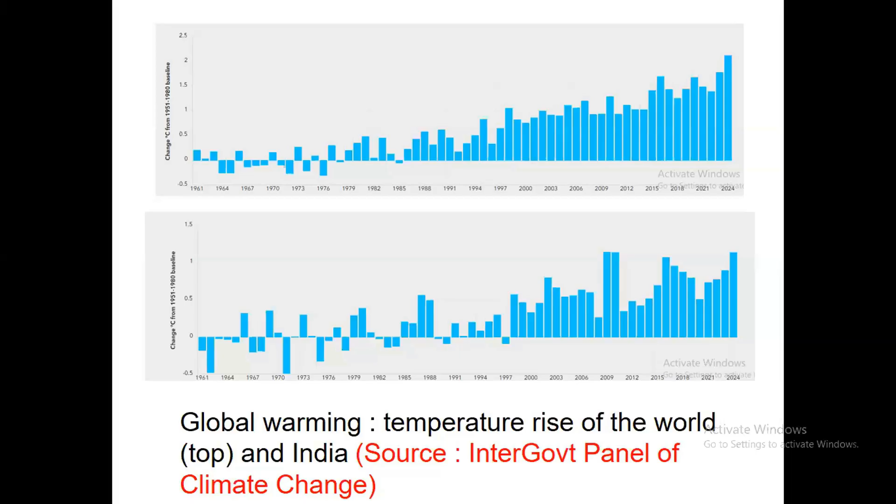Particularly people below the poverty line are suffering more. But nevertheless, we have to fight against that, and these issues become important, reflecting in different sectors, be it energy, agriculture, or water usage. We have to understand the context of the environment and how human health is related to that.

So now renewable energy has become very popular. It's well known that energy consumption is a measure of prosperity and well-being. Which country tops the list of well-being or prosperity depends on energy consumption, so per capita energy consumption is published to assess the economic situation.

However, the conventional sources, like coal-based power plants and fossil fuels like petroleum, which is also a major source for automobiles and many industries, come with issues of pollution, and the supply is not inexhaustible. It is a limited resource.

Now renewables are a viable alternative with abundance. Wind will be there, the sun rays will be there, the water and the sea waves will be there, so there is a lot of supply. Therefore they are renewable, and can act as a viable alternative, with the major advantage that pollution is less and the source is economically viable. So renewable is becoming more and more popular.

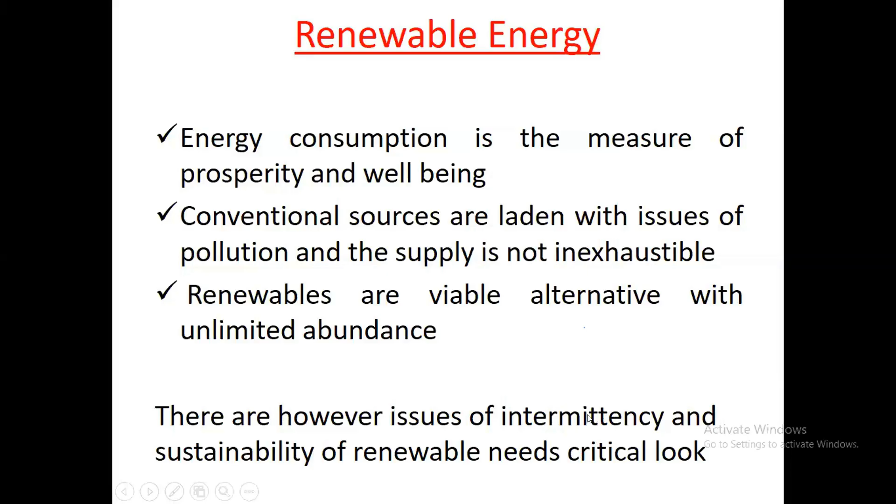So like solar, wind is also having the issue of intermittency. And even if you talk of water-based plants, hydel power plants, even water has scarcity sometimes. The supply is not always at the level we think a priori, that this much supply is always available. That may not be true.

So I already told you that I'll first talk of some wind energy technology, and then talk about sustainability. That sustainability is not so easy to assess, even for renewable technology.

So first, wind turbine. Basically a wind turbine is an energy converter which receives a portion of solar energy, because all of us know that because of the sun's rays and the heat they carry, that actually produces the field which moves the wind. So in a way, wind energy is again the contribution of the sun god.

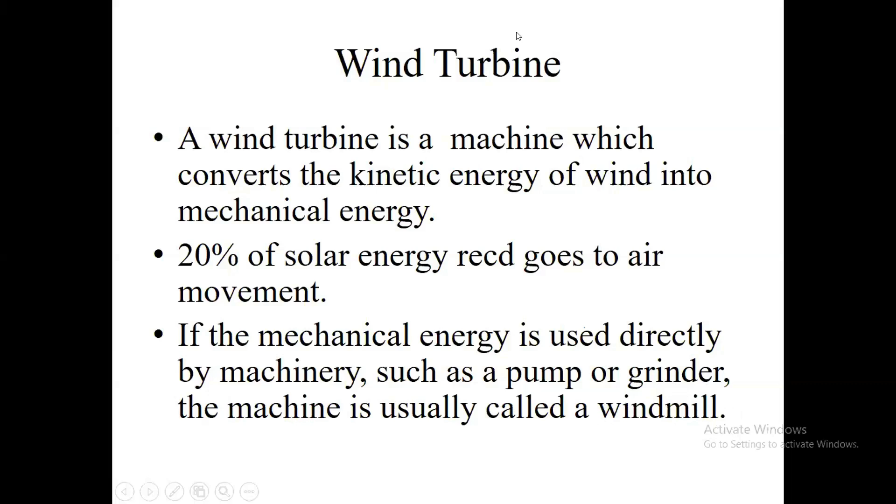So one wind-related terminology is windmill. In ancient civilizations of Europe, you'll find a lot of windmills. A windmill is not a wind turbine in the sense that it does not deliver electricity. A windmill produces other work, like grinding wheat or barley, or pumping water. So if you convert energy to electricity, then it is a wind turbine. Otherwise, we call it a windmill.

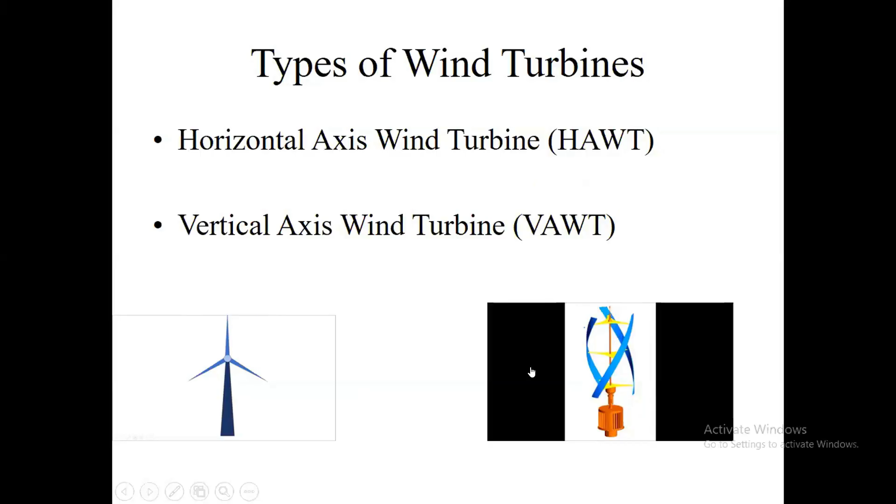So there are two types of wind turbines. One is the horizontal axis wind turbine, which is like a table fan - the axis of the turbine is horizontal. There are relatively fewer vertical axis wind turbines, where the axis is vertical, like an inverted ceiling fan.

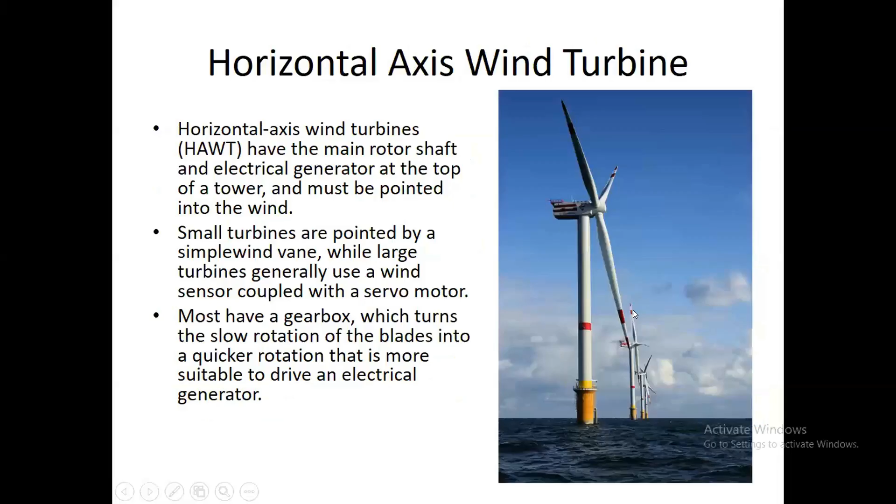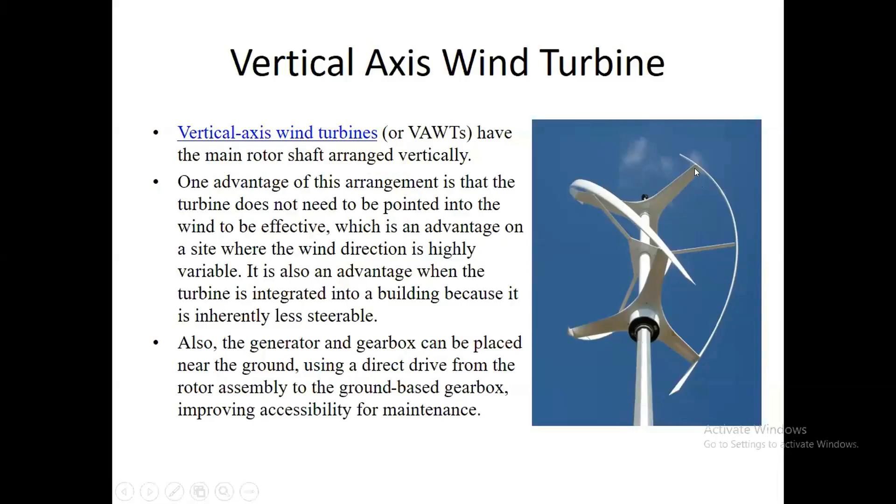But mostly horizontal axis wind turbines supply more power compared to vertical axis wind turbines - they are more efficient. Vertical axis wind turbines work better when the velocity of air is low. So where I have a lot of air supply, I should go for a horizontal axis wind turbine, since they are more efficient. But if I want to tap energy from the roof of a high-rise building, where there is some flow going, then I can use a vertical axis wind turbine instead.

So there are different designs you can see. My lecture is not meant to be purely pedagogical - rather, I want to make it interesting in an overall sense.

Without going into technical details of the parameters, I'll just mention the main features. There are basically drag type and lift type wind turbines. Drag type is like buckets, similar to a Pelton wheel where water hits the wheel and it rotates. Similarly in drag type turbines, air hits and rotates it. But in lift type, the profile produces a lift action and then it rotates, like an aerofoil blade.

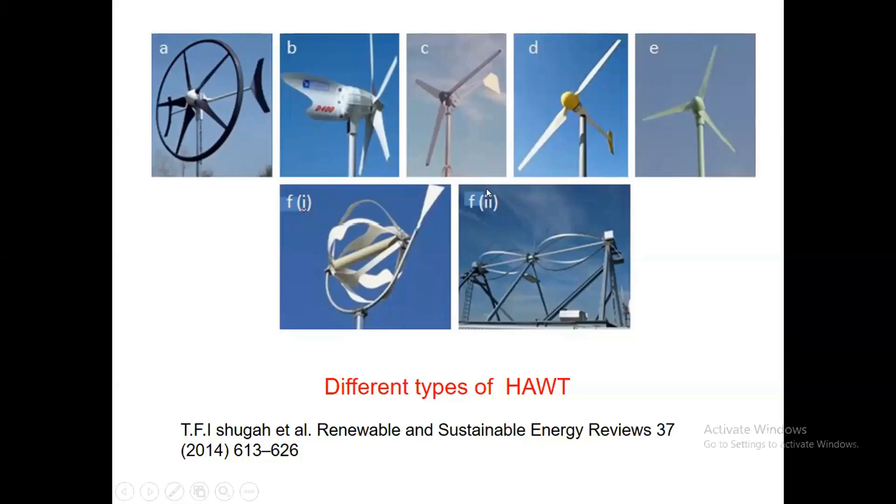Darrieus turbines are basically lift type wind turbines. They operate with an aerofoil type shape, so a high level of lift is generated, which helps it rotate.

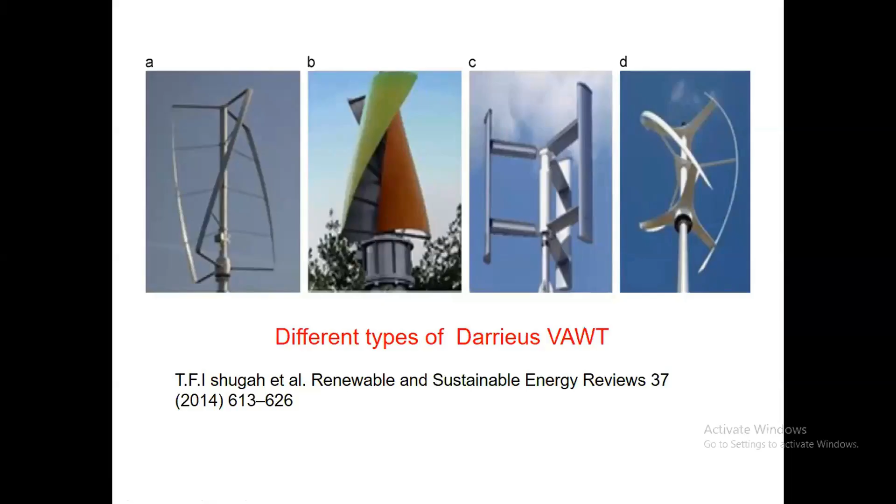Because energy is an important commodity everywhere, people are trying to capture whatever energy is available. If you look at Boston airport, on the roofs there are a number of turbines for capturing whatever energy is there.

For example, you may be aware that in Kolkata airport, a lot of solar panels have been installed in the runway area, because apart from the paved roads there is a lot of space where planes don't go, just like a field full of grass. So one part of the runway is covered with solar panels, and therefore it is possible to supply a large part of the energy required for the building from the panels.

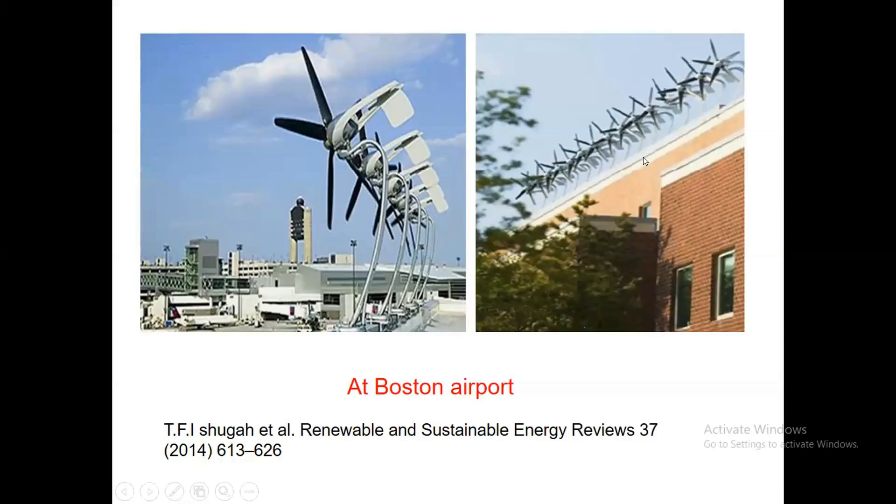Similarly, this is often a strategy to harvest energy from the flowing wind from the top of a building using certain turbines. You see one clever design: windmill on highway.

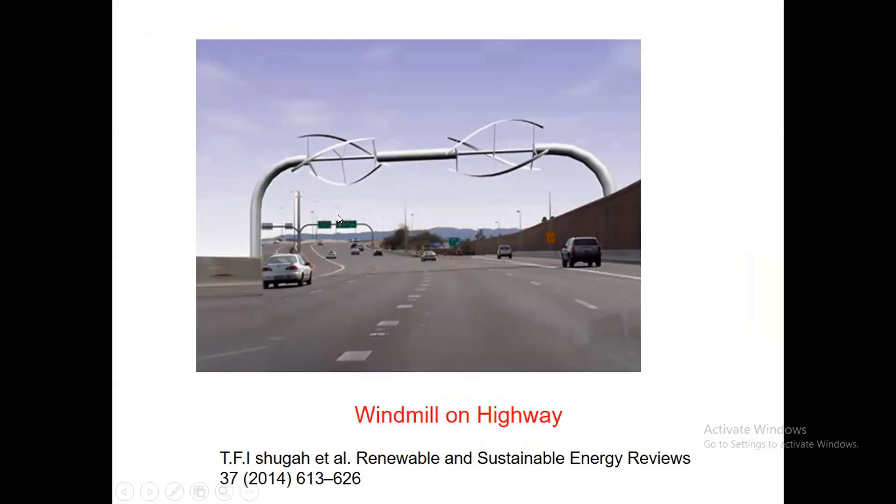So these are two wind powers, I mean wind turbines. There is normal air plus the vehicular movement that also creates some flow field. This can provide energy to these turbines, which can generate a certain limited amount of energy, and they can feed, for example, directly to the traffic lights. Traffic lights need energy, and it can be fed from here.

Sometimes you combine designs, so wind energy blade design is actually a research area. You can do many things here to maximize your energy availability, and therefore combinations - like using different types of airfoil shapes for the wind turbine blade, combining the Darrieus type, which are lift type wind turbines, with Savonius, which are drag type or bucket type wind turbines - you can combine them.

These are like simple drag type, with no blade angle or anything, just strips. But here there are some aerofoil shapes designed. Together they can harness more amount of energy. So this is again an interesting area where you can just try to increase the efficiency.

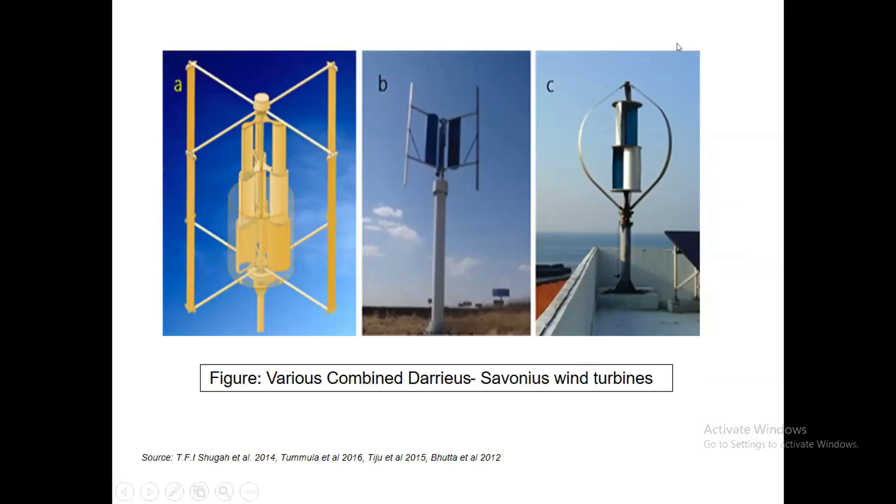This is one of the classifications when you talk of windmills or wind powers - like hydel energy too - the smaller ones relatively 10 kilowatt, intermediate 10 to 250, and even wind turbines are producing up to say 25-30 megawatts of energy. A single turbine can even produce up to 30 megawatts of electricity.

That is by manipulating the size of the blade, you can have as much energy as 30 megawatts. The fact is you need a longer blade, and the height has to be more too, because as you go along the height, as you go up, the wind speed increases. You all know the boundary layer concept - near the earth, the velocity of wind is less, and it increases with a power as the height increases. So that is the strategy.

But then, when you have multiple wind turbines - most of the time there will not be a single one, there will be a number of multiple wind turbines, which will be called wind farms. They are connected to the grid, supplying power to a locality or to a country. A small one is for remote applications, like for example a remote island, where a house may have its own dedicated windmill.

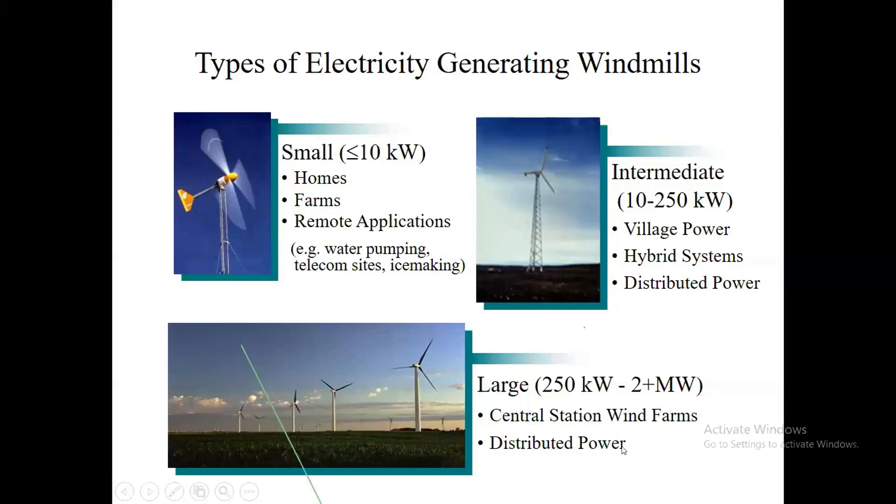But such large plants must be connected to distributed power, so that it is in the grid and can be controlled.

I have some old data. New data is also available, but I have not found time to update it much. Still, it will give you some idea.

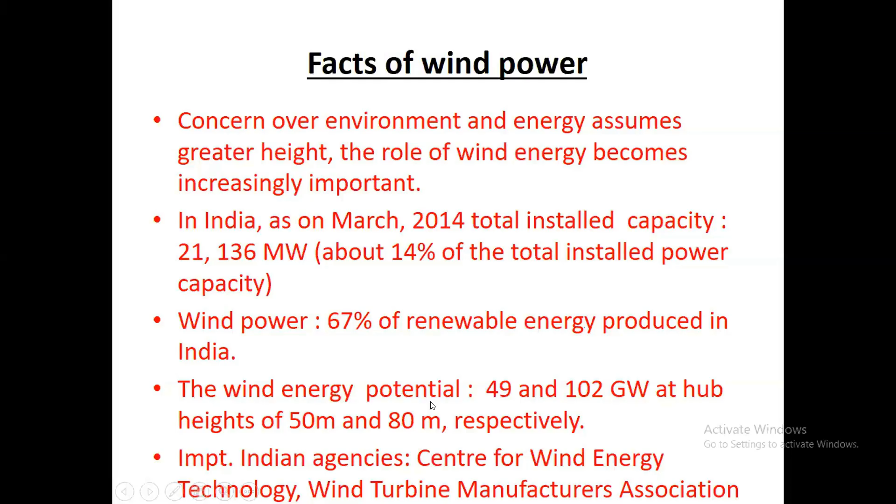Wind energy potential is 49 gigawatt at 50-meter height and 102 gigawatt at 80-meter height, and total installed capacity was 22 gigawatt, so now it will be something like 35. We have the potential of 100 gigawatt, so we can still extract a lot of wind energy, and it is related to the height. If I increase the height of the turbine tower, I can extract much more energy.

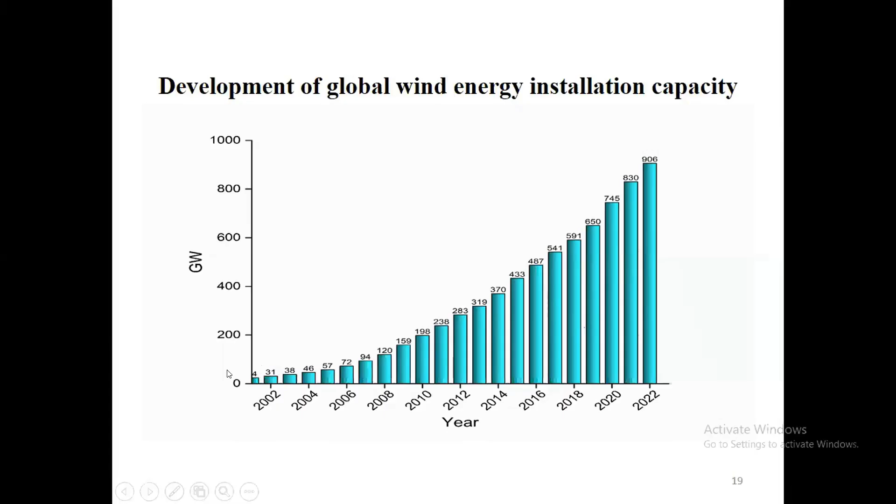Like wind energy, if you look into current data worldwide, you see that almost 1,000 gigawatt of energy was produced in 2022, so by today it will be another 500 gigawatt. It is actually growing exponentially, as the plot depicts. In 2002, how much was there? Only 31. So in 20 years it has grown 30 times.

When renewable energy grows this fast, naturally the cost of energy comes down fast. That is very important, because people will not go for something costlier than the available technology. Whatever the merit, the cost must come down, and that is also an aspect of sustainability, that cost is given its due importance.

Now we can safely say that the cost of electricity per unit for renewable energy and coal-based power plants is at par. That is why countries abroad have almost phased out coal-based thermal power plants, and India can also make strategies to go for...

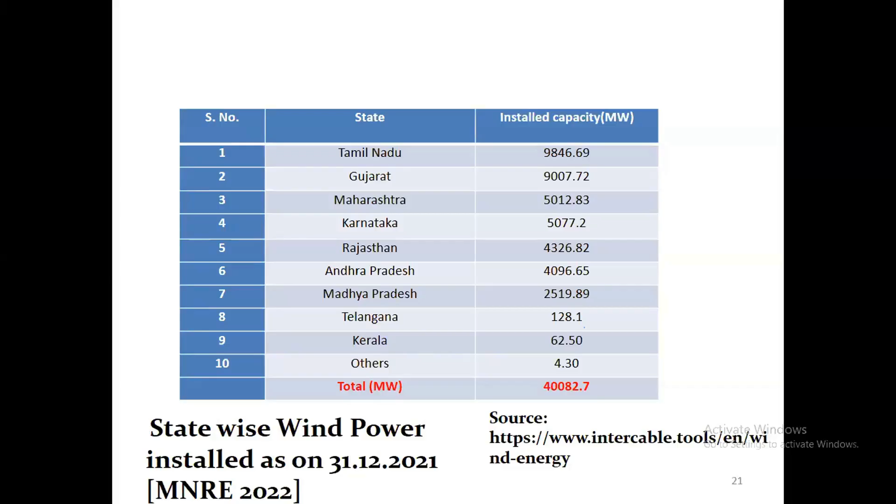Replacement of coal. Of course, in the near future, coal cannot be replaced, because we have a huge population with a lot of power requirement, and the supply of coal is also there, so it will continue. But we can afford wind energy as the sizes of the plants are increasing. Eventually cost has to come down, which has happened, and which is giving us the advantage.

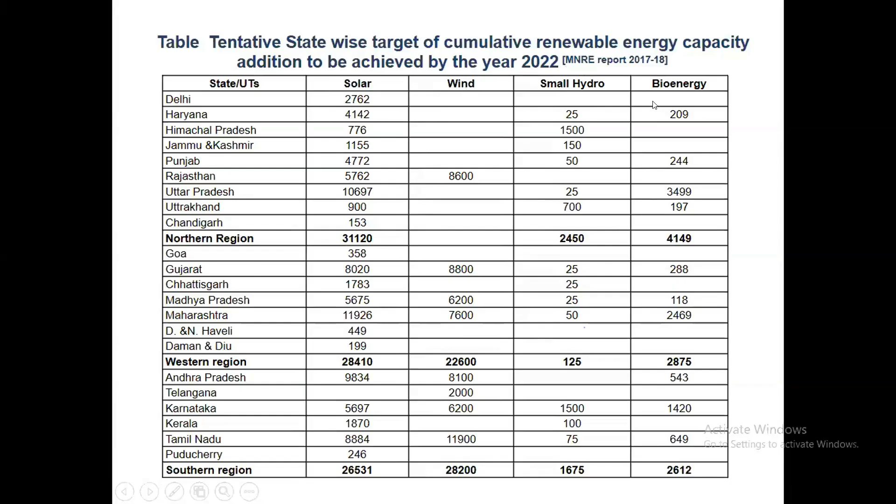State-wise, let me skip this. There are tables you can find in Ministry of Renewable Energy, non-conventional and renewable energy reports. They publish reports regularly, and you can see how the states are growing in different sectors like solar, wind, hydro, and bioenergy.

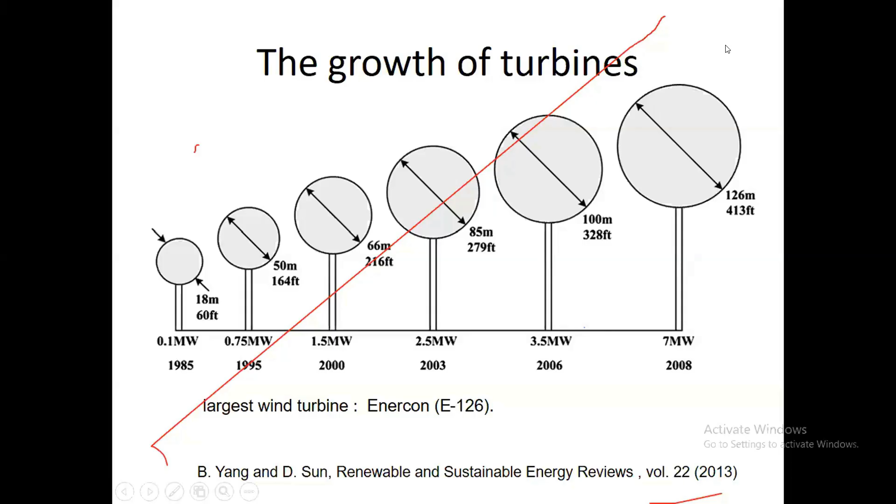The very interesting thing is the size of wind turbines. A typical wind turbine is a very big machine. The diameter of the rotor is something like 413 feet, almost like a football field. One huge structure we are habituated to see day to day is an aeroplane, and aeroplanes are huge, but still larger are the wind turbines. They are growing very fast, becoming very big entities, posing more engineering challenge, technical challenge, and sustainability challenge as well.

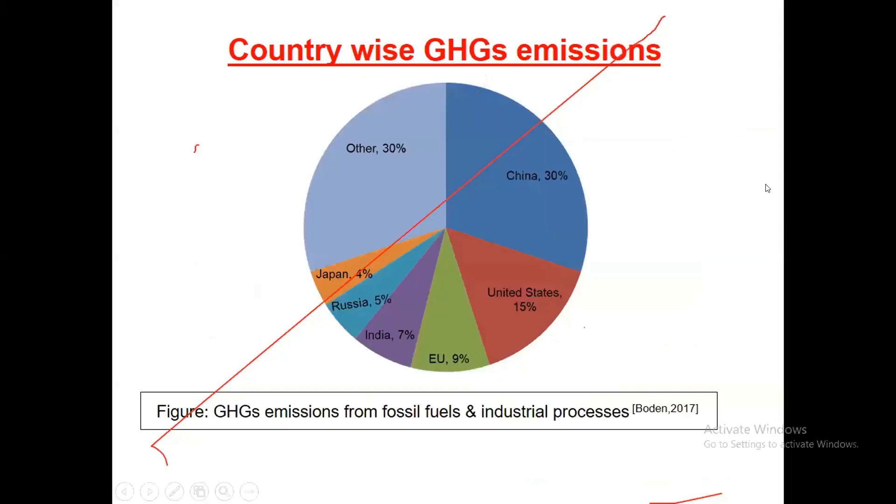So we are talking of wind energy, but this is greenhouse emission—I'll skip that. So in the context of renewable energy, this is important to mention.

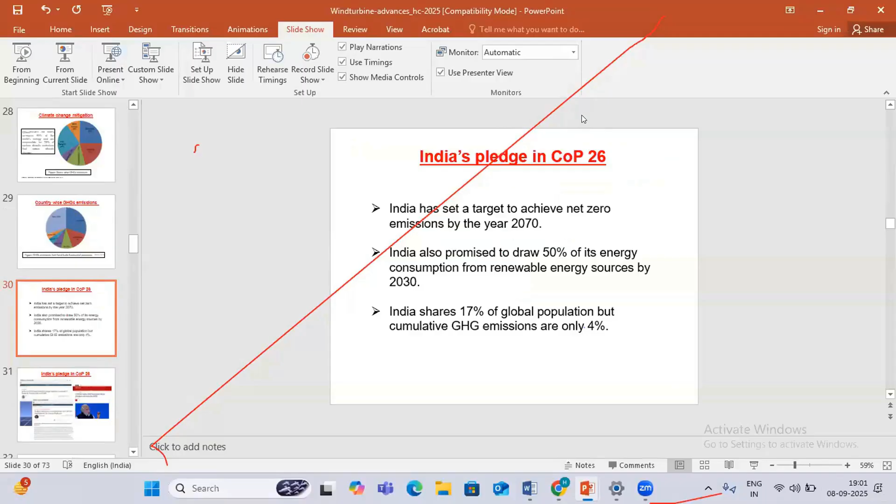This is important to mention about India's pledge at the Conference of Parties, which is a climate-related event, represented by the Prime Minister of India and other departmental representatives from different ministries. We have promised to have net zero emission by 2070, and by 2030 our promise is to develop 50% energy from renewable sources.

One positive fact for India is that we have almost one-fifth of the global population—every 5, 1 is Indian—but our emission is only 4%. That means per head emission for Indians is very low. That does not mean we should not work on renewable energy, but it means we have some leeway, some more area to work on, and we can still continue for some time with carbon-based, hydrocarbon-based, coal-based power plants.

So this Conference of Parties, they are given a lot of weightage. Like India says solar energy is 17 times in 7 years, so similar figures I have shown for wind. Wind is also going very fast, and net zero is placed by 2070.

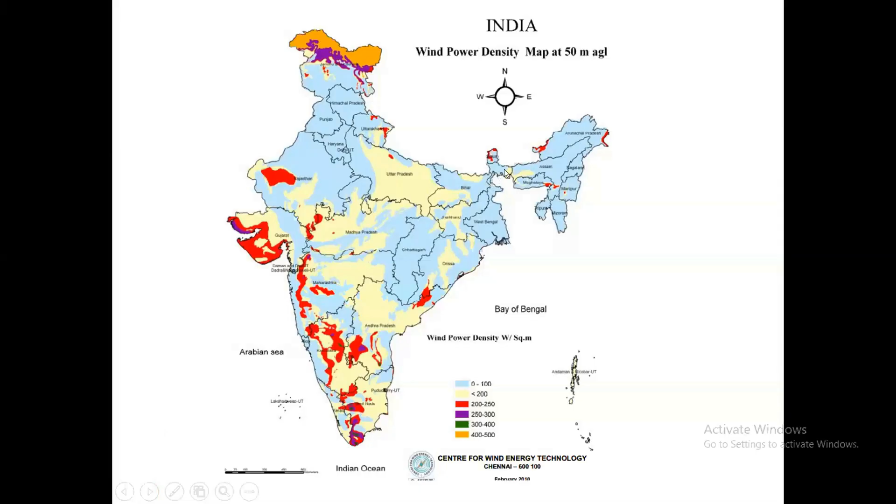Now talking of wind, can we put wind energy everywhere? We need something like power density, watt per meter square. This map shows which areas are energy dense, so it is easier to put wind turbines there. Where the flow is not much, only small wind turbines can be used, some vertical axis wind turbine technology on the rooftops of buildings. But the coastal areas, for example, or the Himalayan areas, you can use where we have higher power density.

So wind, we have to remember, is stochastic. There are a lot of works on wind speed. Wind velocity changes every minute, every hour, every day, every month, every year. You will see that even the average wind speed of this year may be 30% less than the last year. So it is highly stochastic.

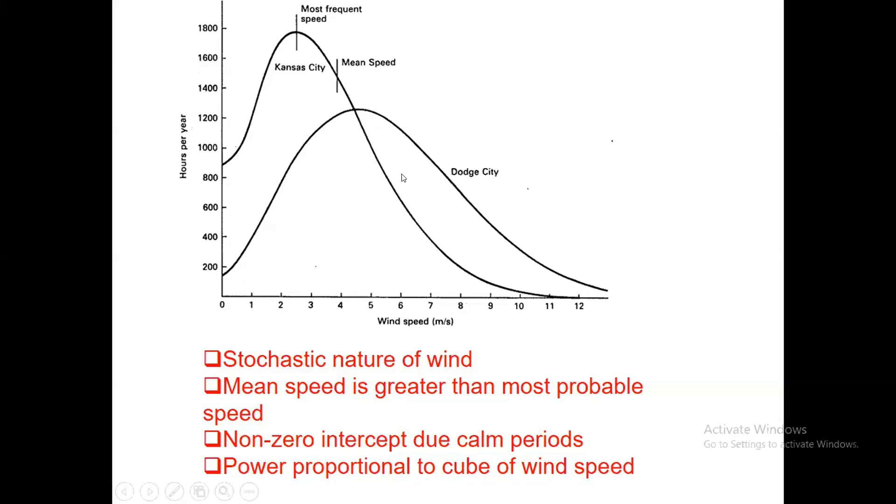So if you want to analyze the data and use it for engineering design, you have to do a lot of calculations based on statistics. For example, many of you know why statistics is used for wind energy. We'll not go into the details, but we have to remember this wind speed distribution in hours per year - that means almost 1,000 hours it was average 6 meter per second. But it can vary, as I said, day wise, month wise, year wise. So it's very stochastic in nature.

The important physics of the wind turbine - again we will not go into detail, but most textbooks give the basic thermodynamics of a wind turbine. As you know, thermodynamics governs the energy. Here, of course, we are not talking of heat, but energy - what is the limiting energy, what is the maximum energy we can extract?

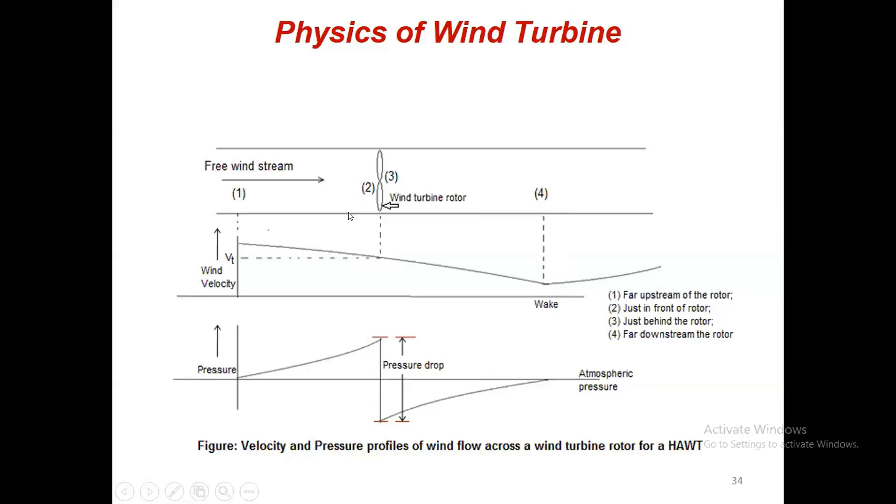So this is a rotor, wind is coming, and this wind turbine rotor will extract the energy. Naturally the velocity will fall here - wind velocity across the rotor will fall, and further down there will be less wind energy. So this kinetic energy is extracted, and for preliminary purposes you can do a simple energy analysis using the first law of thermodynamics and continuity.

So finally you can arrive at a relation that the maximum power of a wind turbine is 8 by 27 times density of air, area of the turbine, and the cube of the velocity of air. Remember that wind power varies with the cubic power of air velocity - that means if your velocity is doubled, wind power will be 8 times. Naturally the area will be there, the density will be there.

Density is more or less constant everywhere. Area is how big the turbine is, and velocity is cubic. So this is the input energy, rho A v1 cube - that is the kinetic energy, half rho A v1 cube. You know wind energy is kinetic in nature, so kinetic energy is half mv square kind of thing. If you divide this by that, you get a factor of 16 by 27.

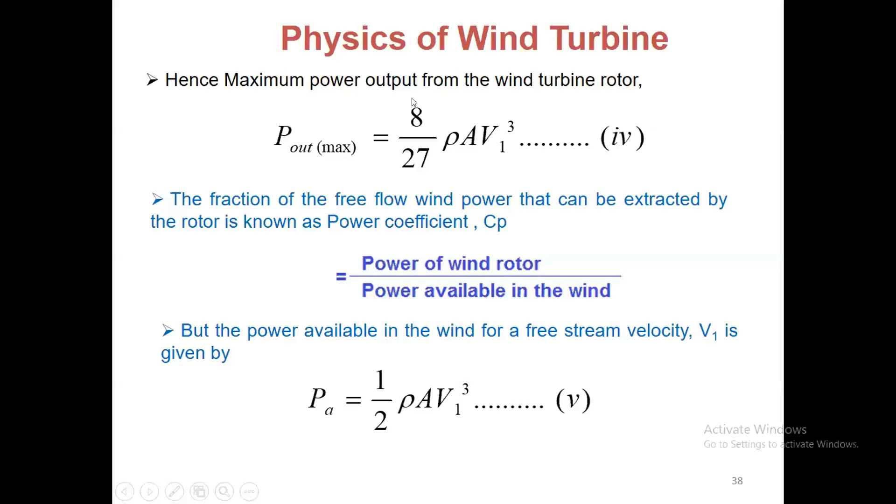You may remember the Carnot cycle - Carnot cycle in a power plant gives the maximum efficiency as 1 minus T2 by T1. No way can you get more efficiency beyond the Carnot efficiency. Similarly here, if you apply the basic fluid mechanics and thermodynamics of energy conservation, you get a ratio of 16 by 27 - this is called the Betz limit, 0.593. This ratio of the power of the wind and the power you get from the turbine is called the power coefficient CP.

So this CP can be maximum 0.593, or 59.3%. Again, it is a counterpart of the Carnot efficiency in a thermal power plant. Similarly, in a wind turbine this is the limiting efficiency coming from basic fluid mechanics with law of energy conservation. However, we'll get much less than that, and particularly a horizontal axis wind turbine will have more efficiency than a vertical axis wind turbine.

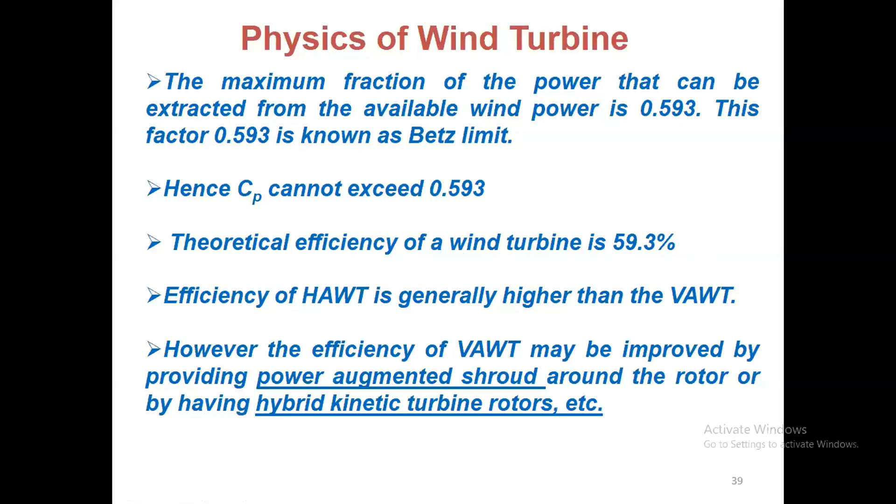It can theoretically give cubical power and go faster, but we don't operate like that, because finally you have to produce electricity with certain restrictions - a fixed frequency, a fixed voltage. It has to be synchronized with the grid and the machines it supplies. So within a speed range, we operate at rated power.

At a certain speed it starts producing power - that is called the cut-in speed. Then we reach rated power, and after that, when the speed is very high, it will cause stress on the blades, so we don't want to operate there. We stop the turbine using a brake mechanism, so it stops at that point.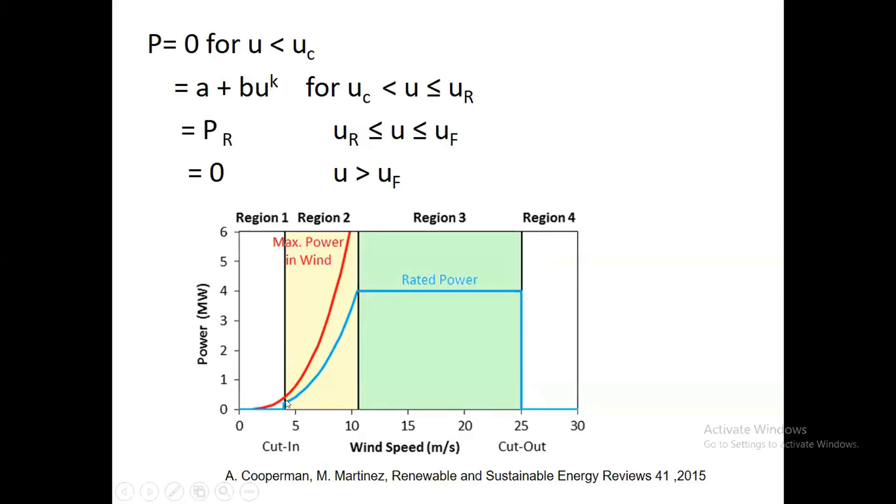This is called the cutout speed. Theoretically, power can go like a cube, following this curve, but practically only in this middle range is it variable, and then we supply at rated power. So cut-in speed is where power generation starts, rated speed is where rated power generation occurs, and then there is a furling speed or cutout speed - when you apply the brake on the wind turbine, it no longer gives you power.

So there is a power curve, and when you buy a wind turbine, the manufacturer will give you this power curve.

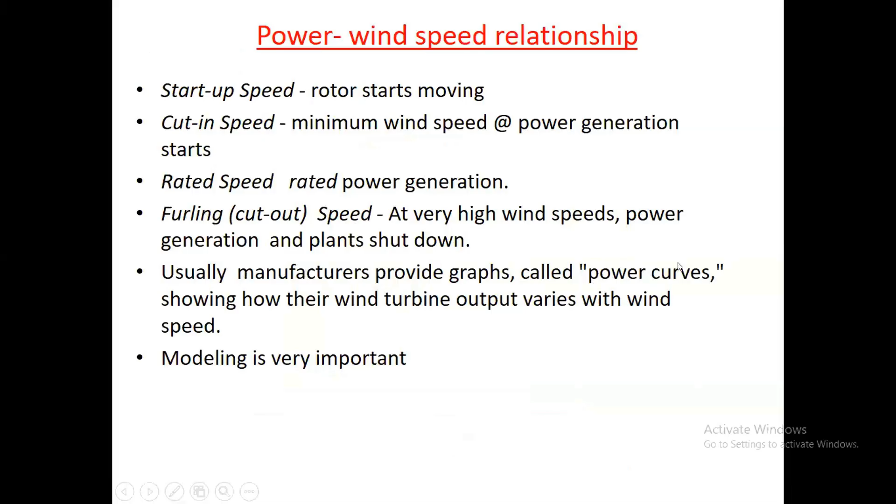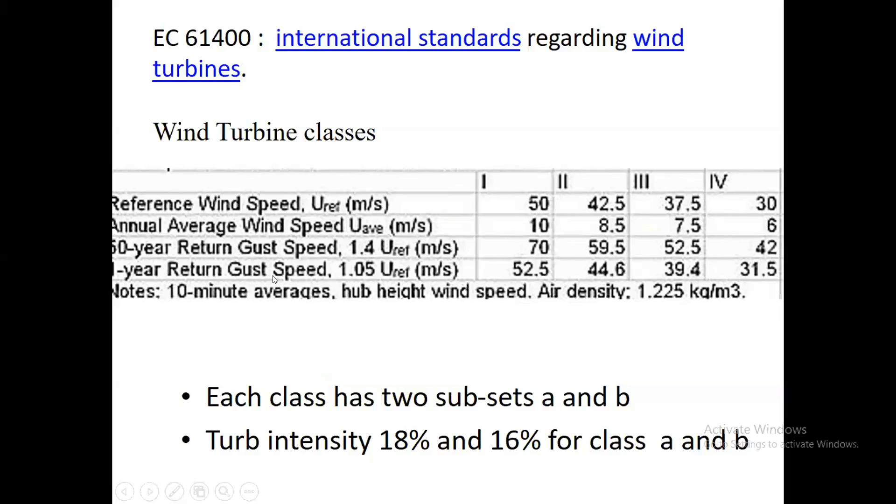Now there are certain standards, like wind turbine classes - you have to follow standards like type 1 to type 4. There is a certain reference wind speed for which turbines are designed, and these have now been standardized.

You can also have a scale of velocity, so a lot of data has to be analyzed. Wind speed measurement is typically made about 10 meters above the ground. Small wind turbine heights are 20 to 30 meters, while large turbine heights will be around 100 meters.

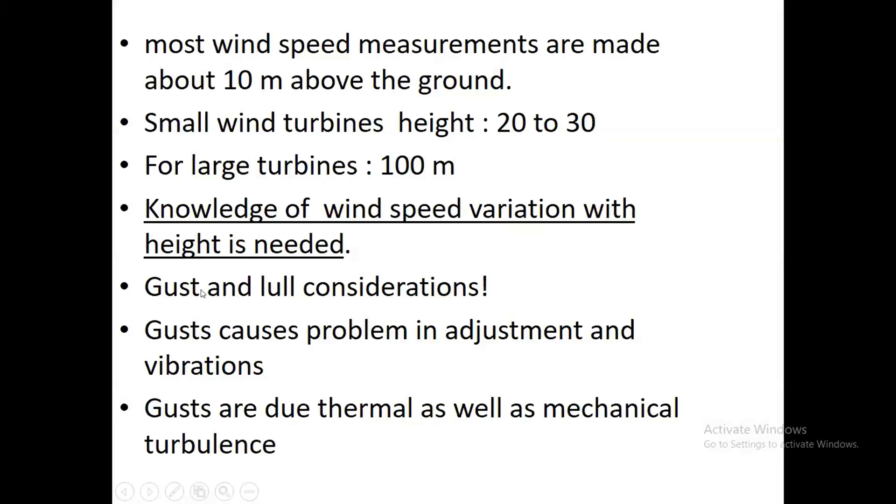Then gusts and lulls - very high speed variations and such things - have to be considered because these are dangerous for the wind turbine blades. So all these meteorological factors are important.

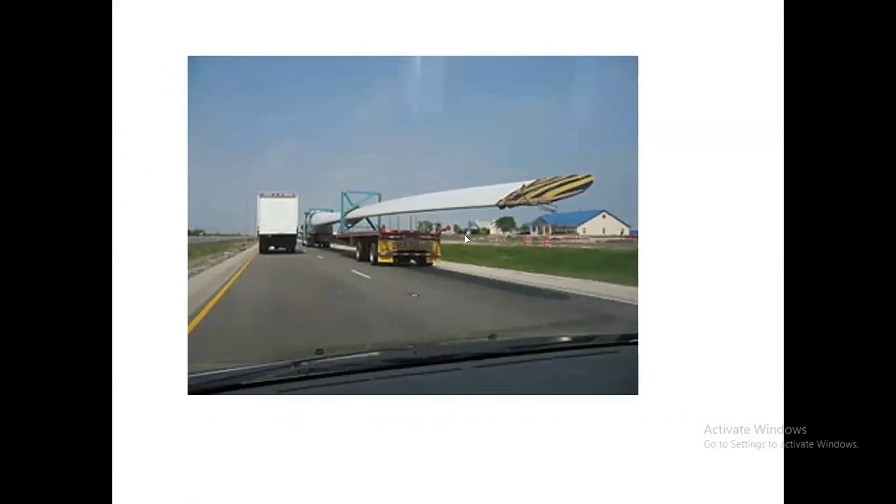This picture shows one blade being transported on a truck, to convey that this is a very, very huge structure. As I said, it is bigger than a plane - one of the biggest achievements of technology.

You can measure wind speed using anemometers and balloon releases. Wind also affects the physical locality, and from that people have gathered evidence and knowledge about wind velocity - like sand dunes in certain areas, and even lake structures. If you look at the topology, you can get a visual indication of wind speed from these important facts.

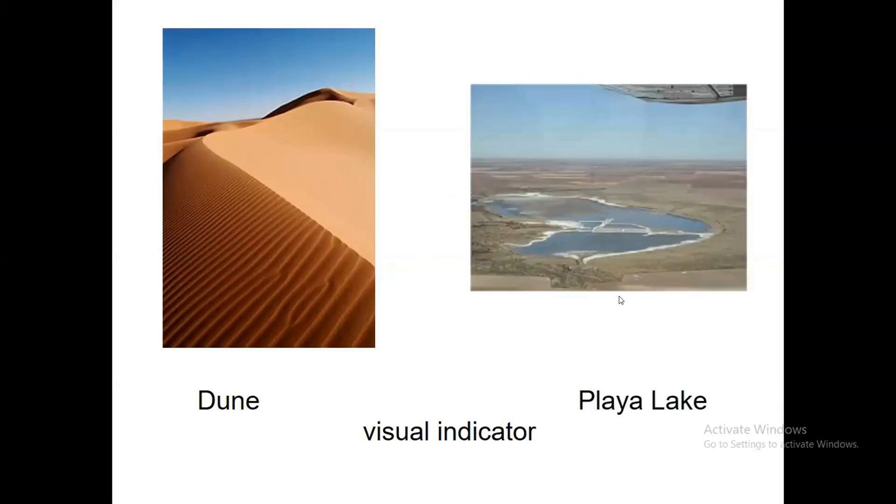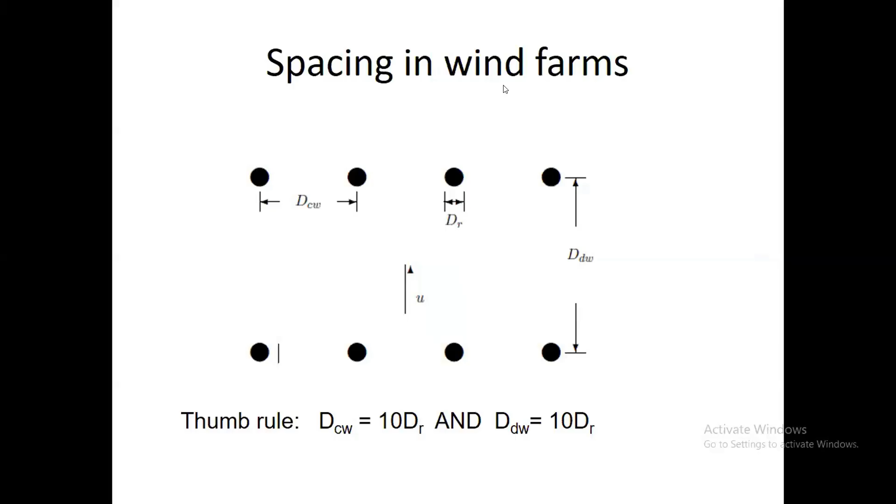I mentioned wind farms - there won't be just one wind turbine, there will be plenty of them. So the gap between them, the pitch in the horizontal X and Y directions, is important, because if there isn't enough distance between two wind turbines, the energy extracted will be less. The air carries energy - if one turbine extracts energy, the velocity behind it will be low, so the velocity must still be proper enough for the next wind turbine. These considerations are required in wind farm design.

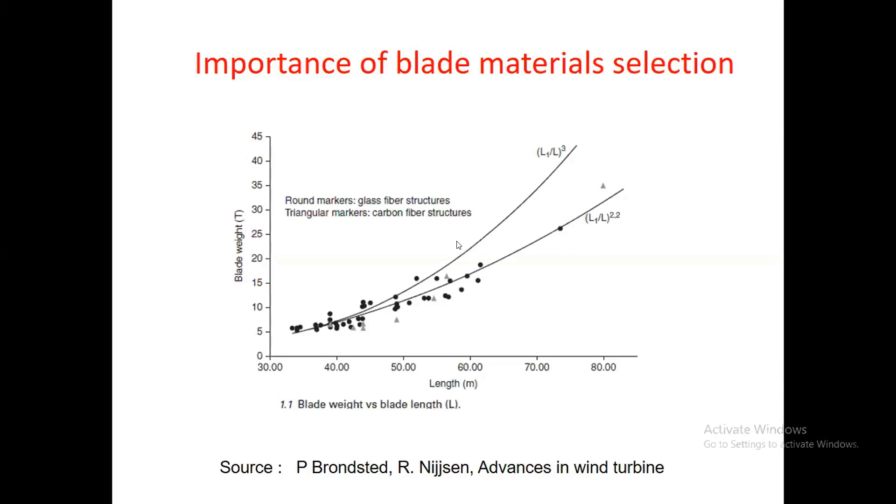So the design of wind turbine blade is a compromise between aerodynamical and structural considerations, because aerodynamically it must rotate fast, but it is also a structure, so it has to withstand the stress. So the outer part must be aerodynamically correct.

For example, a plane will not fly if the profile is not proper to generate that lift. Similarly, for a wind turbine to work, it must follow the aerodynamic considerations for the outer part, but the inner part must provide the strength. So structural consideration is for the inner part of the blade.

So therefore it is typically hollow with outer geometry formed by two shells, one on the suction side and one on the pressure side. So structural webs are fitted to join the two shells to transfer shear loads.

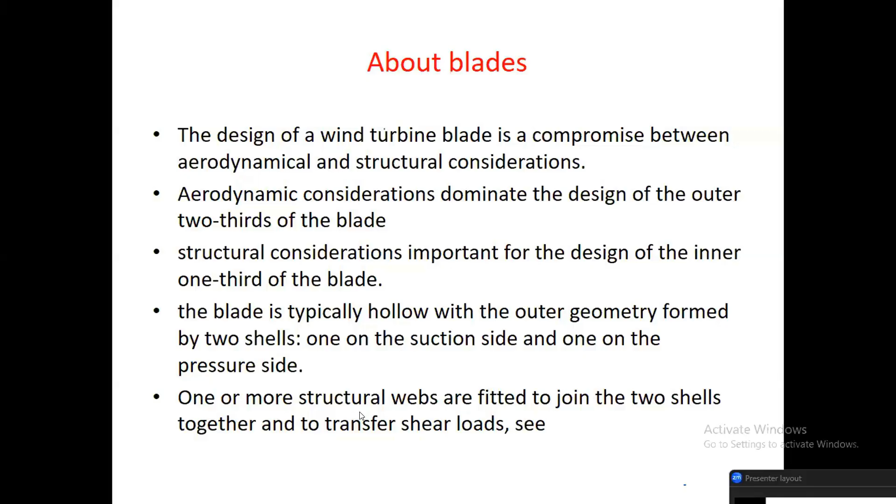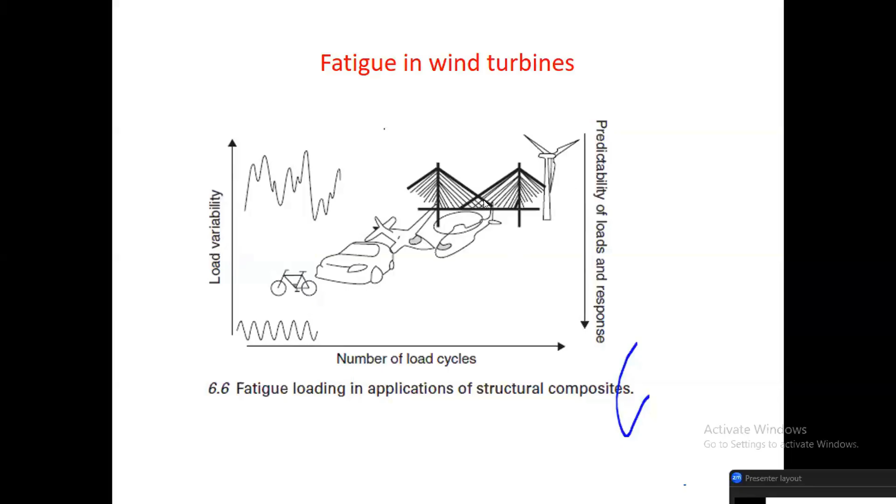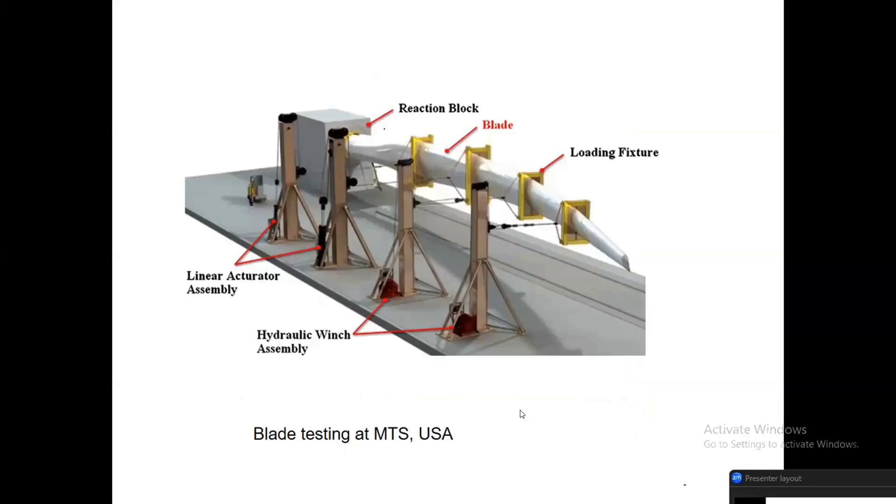So there are wind turbine test benches, which require huge space and structure, like blade testing at MTS USA. And this surface, the blade surface, apart from the fluid mechanics part, again you have to be careful with the surface. It may need coatings.

So a wind turbine can be in a very cold zone, minus 50, to a hot desert. It is subjected to UV radiation, chemical attack, blood from insects, or feces from birds—these are the things that affect the surface. There will be lightning. So naturally, if it is a huge structure, occasionally there can be lightning.

Then ice can form over this. The rain will be splashing over it. So all these things make the protection and coatings a very serious issue. For which again a code is there, IEC 61400.

So my purpose is to draw attention that this is basically a fluid machine delivering energy, but so many issues are coming there, from design to material.

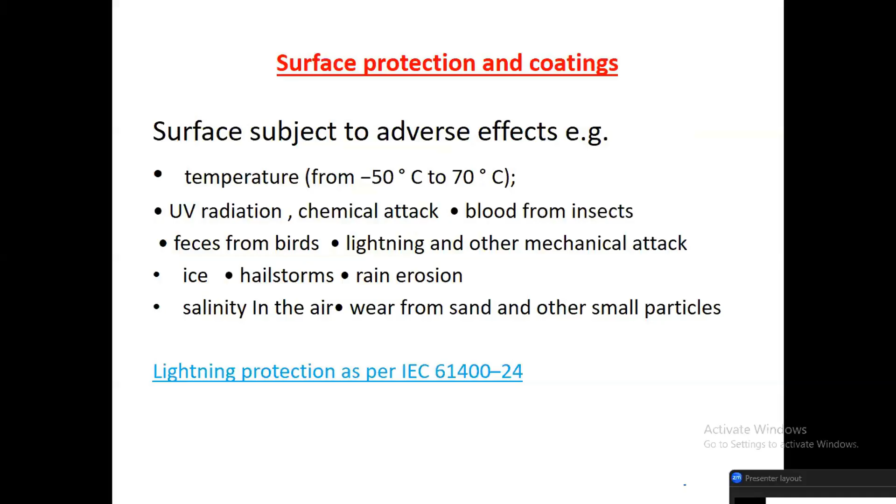So the CFD part itself is a subject of a big topic. A lot of CFD work is being done, because if you want to understand the basic physics, you have to solve the structure, solve the thing in terms of numerical analysis.

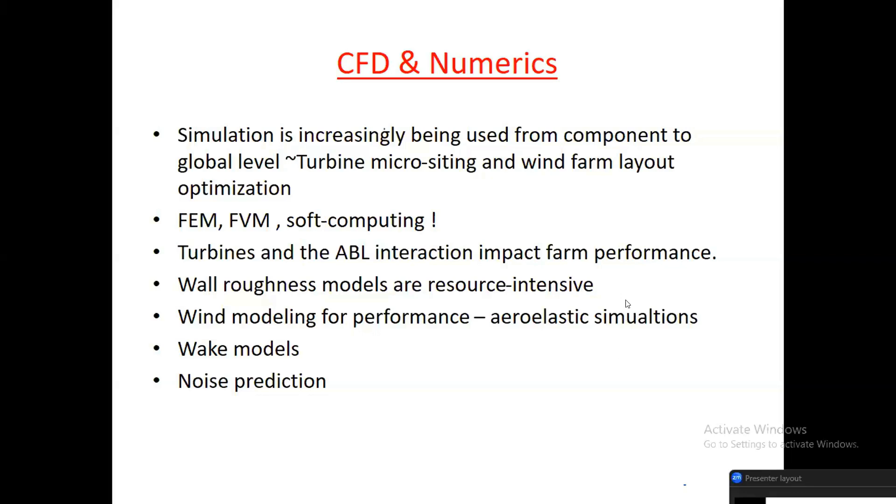So from that, you can even predict what kind of noise will be there, because noise is basically the pressure field. So if you can resolve the turbulence properly, you can predict the level of noise it can give. You can do the performance analysis in terms of aeroelasticity, so not only power, it will deliver the associated stress level.

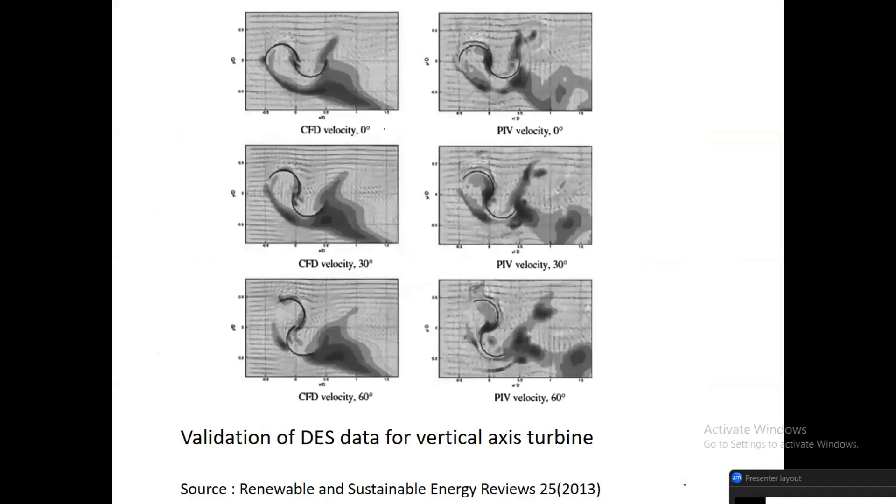These I can skip, but these are, for example, you can have insight from the simulations on the flow structure.

So the ultimate aim is to understand the power it can deliver and the stress it can have, and also how it behaves during starting and during closure, and also the steady state operation.

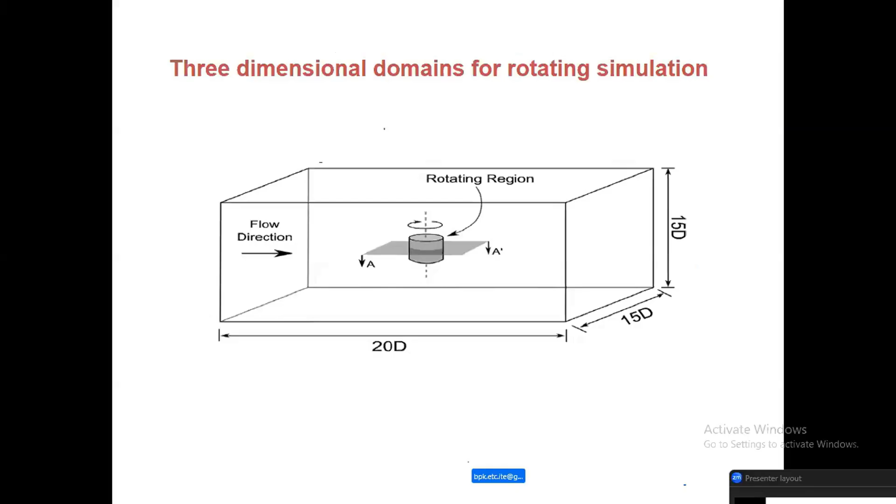So to do that, you can take help of numerics. I'll skip about the numerics part, but now the pollution issues are again predominant here.

So I'll go to the sustainability lecture. I have some 20 minutes or more than that, so enough time is there. I'll go to the sustainability lecture shortly.

But in this basic lecture itself, let us see that wind energy, we call it green energy, but yet it is a source of noise pollution, because the machines are running very fast, so there is continuous generation of noise.

Then there is visual effect on surrounding. It is a fact that in many places people object if you put up a wind turbine. For example, in certain places in India, if a new plant is announced, the local community may challenge it based on the claim that it disturbs their ecology, peace, or heritage. Similarly, airports in advanced countries are built away from cities because people are disturbed by the noise of planes. If a company wants to build wind farms in a hilly area, people may say their scenic beauty is disturbed. For this there is a term: not in my backyard, called NIMBY.

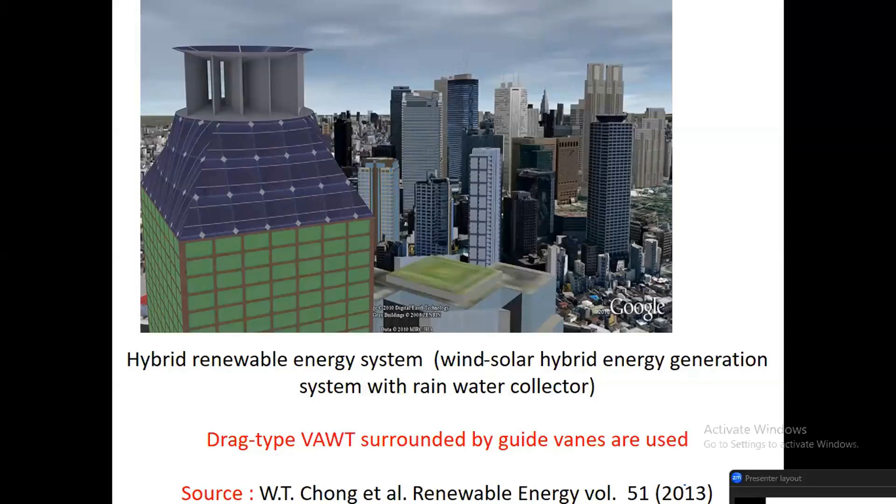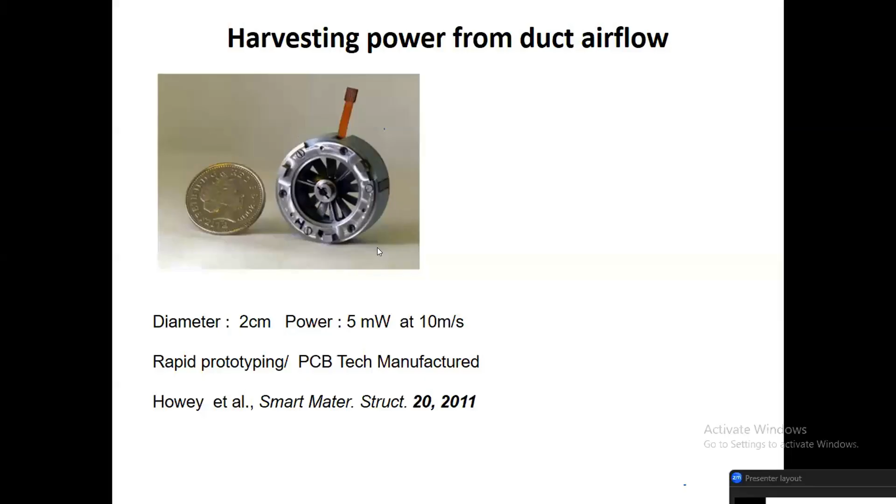For example, at 10 meters per second, this 2 centimeter mini plant is delivering 5 milliwatts. These are in infancy as a research area, but who knows, one day they can be utilized more cleverly - this energy could be good enough to charge a mobile phone. So just with a pocket wind turbine, capturing a small stream of air, that can fit to a charger and your mobile will get charged.

To summarize the scopes of research in wind energy: first, we require as much energy as possible in all sectors, be it a car engine, thermal power plant, or hydraulic power plant. Even a small increase in efficiency, less than 1% or 0.5%, is meaningful in terms of economics and environment. So performance and capacity improvement will always be a research area.

Therefore aerodynamics, blade design, new types of turbines, control strategies, and of course the corresponding electrical part need improved generators and better magnets, because you have to extract as much power as possible. Cost reduction is always there too, possible through blade design strategy and selection of material, and if you increase the height of the wind turbine, you get more air velocity.

Now you require statistical tools to predict, forecast, and assess the life of the wind turbine, particularly for wind speed, which is stochastic in nature. You need to analyze the wind power potential or wind power density in a better way, and then apply it in zero energy buildings and energy harvesting. Small turbines can also be used for micro electromechanical system applications.

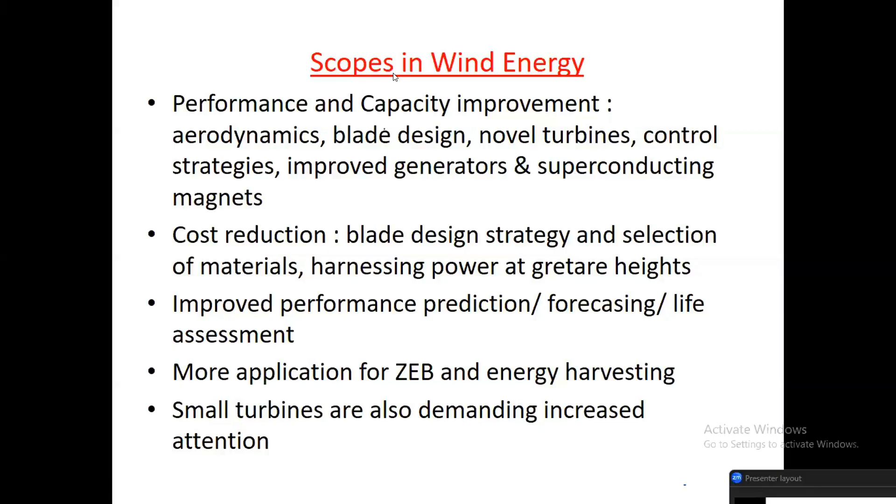Now I will go to the second lecture. I have divided it into two presentations.

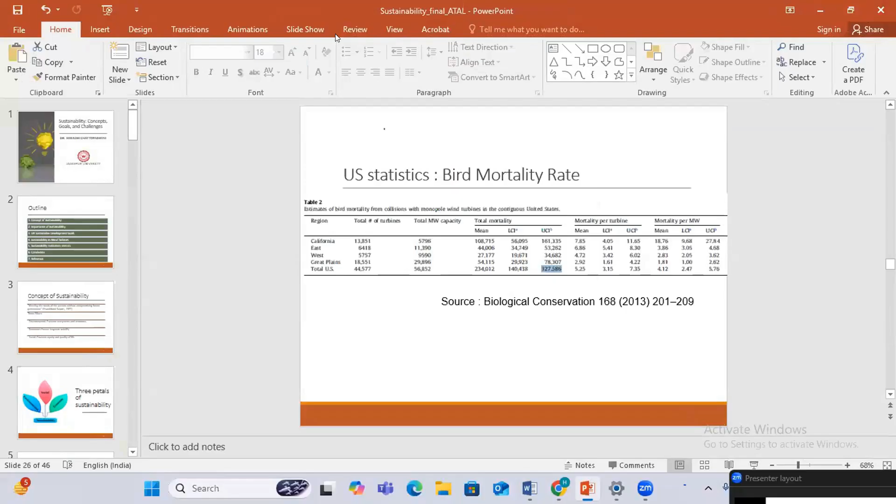So, okay, am I audible? Yes, sir. Yes, sir. Yes, sir.

So I am going ahead, continuing where we'll examine the sustainability aspect, or in other words, we'll take stock of the pluses and minuses, pros and cons, positives and negatives of a technology with respect to wind power, which can also be applied to many other fields. Because in simple words, you cannot say this is good or this is bad. Things have better sides, things have some negative aspects, so you have to weigh it. And one way of weighing this is looking at sustainability.

So sustainability is now a buzzword, everybody is talking of sustainability. As early as 1987, it was defined as meeting the needs of the present without compromising future generations. For example, we are using petroleum. If we use petroleum limitlessly without caring for future generations, that can eventually lead to a problem where our children in the future don't have any source. So you have to look into whether there will be enough for the generations to come, whether human beings will survive.

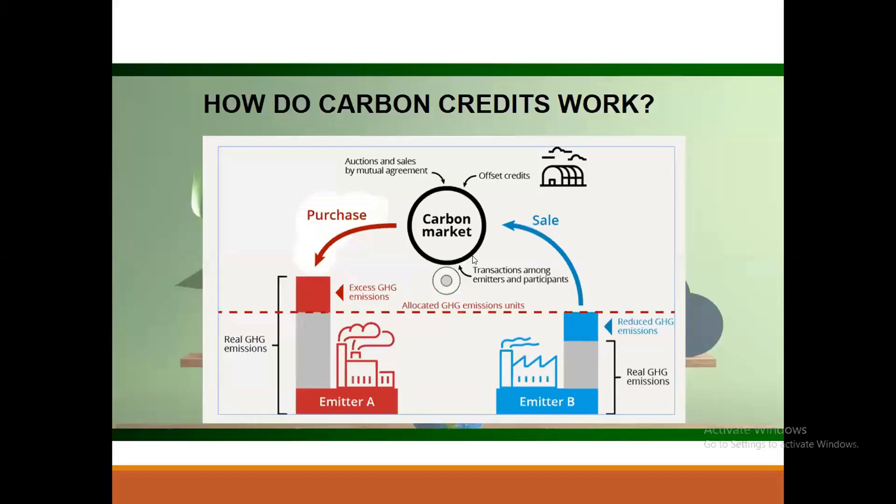So now coming back, at the same time it is important, because we are talking of sustainability, it may not be directly linked to today's topic, but it is important to cover water usage, because water is one of the important items in terms of sustainability. Most of the time there is excessive wastage, globally and locally you can see. Fresh water use has gone up by six times since 1900. Particularly with technological growth, this has become a big challenge.

I am particularly drawing your attention, you can study this in available resources, that AI is one of the biggest contributors to water drainage. For example, one ChatGPT session takes about 0.5 liters of water. Training large AI models can take up to so many gallons of water. And data centers require huge cooling. Data center capacity will grow by 160% by 2030 because we are having more and more data, more usage of AI, so they are all connected. They are taking a lot of resources in terms of water and energy, and these are important to keep in mind when we talk of sustainability.

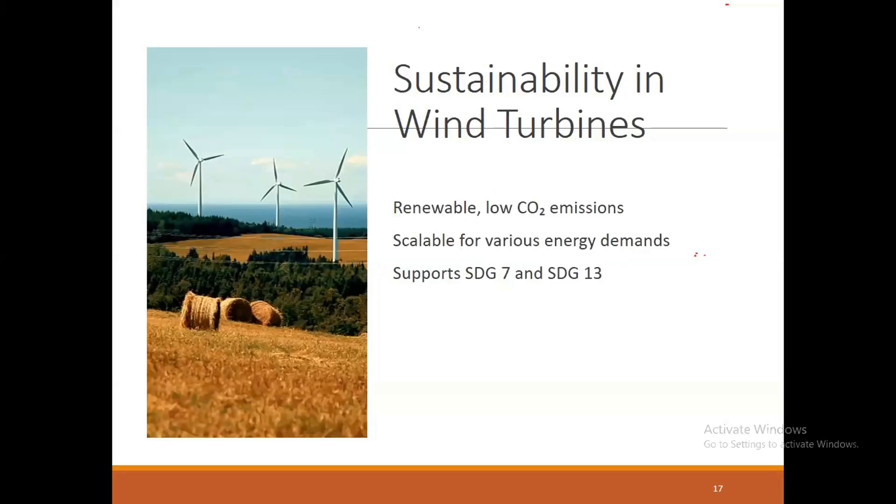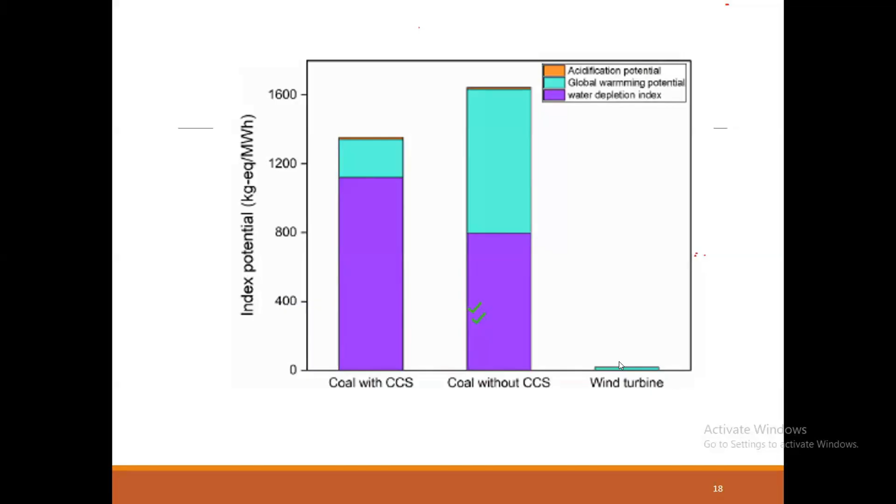So you can see that in terms of water usage, there is no water usage, there is no global warming generally in the general sense. So this looks to be very attractive. Of course it is attractive, and that is why it is growing very fast.

Now again, from the economic side, if you look into that, the levelized cost of electricity - this part is somewhat difficult to read. Actually it shows how cost of electricity is estimated. So if you have a power plant, the cost depends on what is called the capital cost, running cost, and material cost like fuel cost and all.

So you see this is 2010 and 2022 cost of electricity. In 2022, wind farm cost and coal cost are almost par - it's in terms of US dollar. So cost of wind is say 0.08 and is only 0.012 less for the fossil based plant.

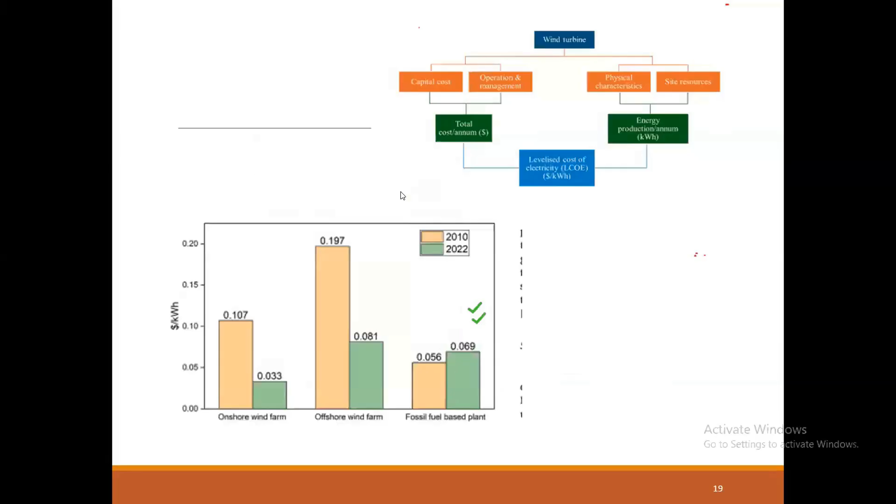And for onshore wind farm, it is still less. So if you have an offshore plant, your cost of electricity over the years for wind has come down. So economically, it has become really a very viable alternative in terms of cost of electricity. So in the previous slide we saw environmental potential, and this shows the cost of electricity.

But still, this means it is very good, very green. So where is the catch? Should we be complacent? Is there no scope for further improvement, or whether sustainability is not an issue here?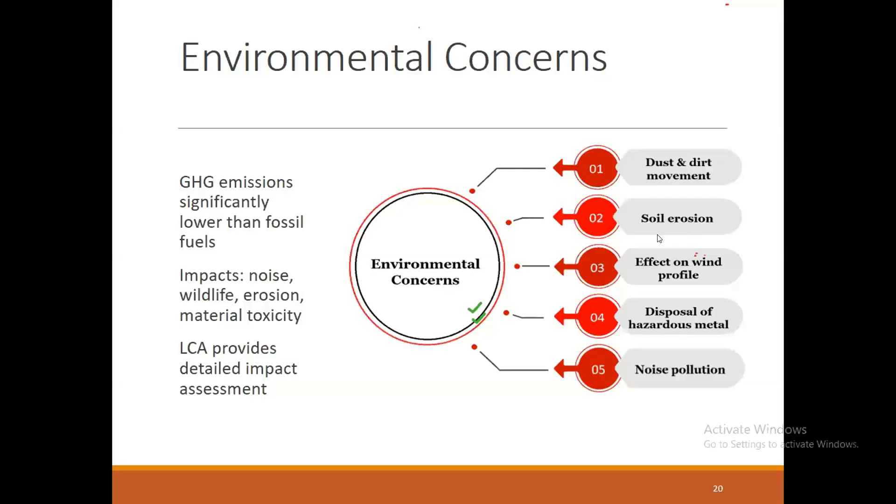So we'll find that talking of social, environmental, and economic issues, there are a lot of environmental concerns we can talk about. Like for a wind turbine plant, the soil erosion, the effect on wind profile, hazardous metal, noise pollutions - all these are active parts. Social concerns - human noise pollution will be there because the turbines run fast. Then there's NIMBY, that is 'not in my backyard, I don't want it.' Many people, many localities consider such turbines as a nuisance to scenic beauty, or think of it as visual pollution, and also of course impact on wildlife - birds, bats, insects.

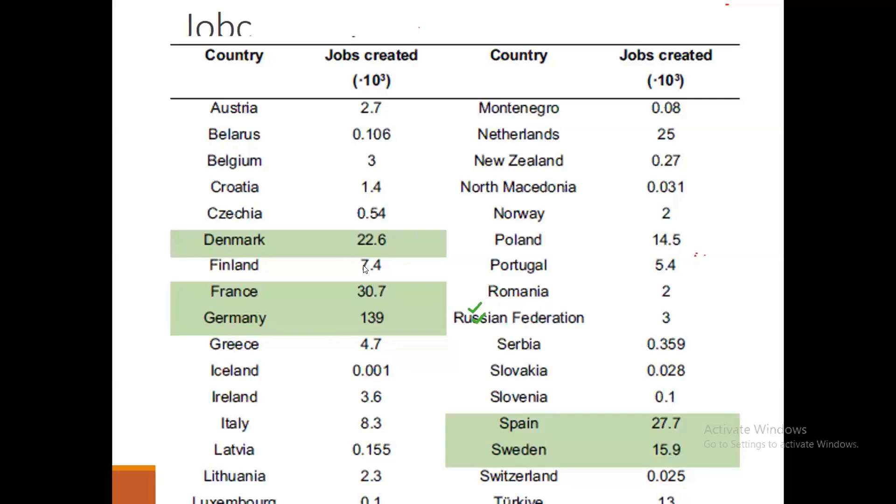So we are talking of social concerns, but then it also has social benefits. Like from a paper, I got the statistics for job creation - certain countries who have gone for renewables, you see a lot of jobs have been created. This is jobs created in thousands. So France, Germany, Denmark, Spain, Sweden - who have made a lot of wind turbines or wind based plants - there's a lot of job creation. So it is a social thing, economic thing. That is one of the better points.

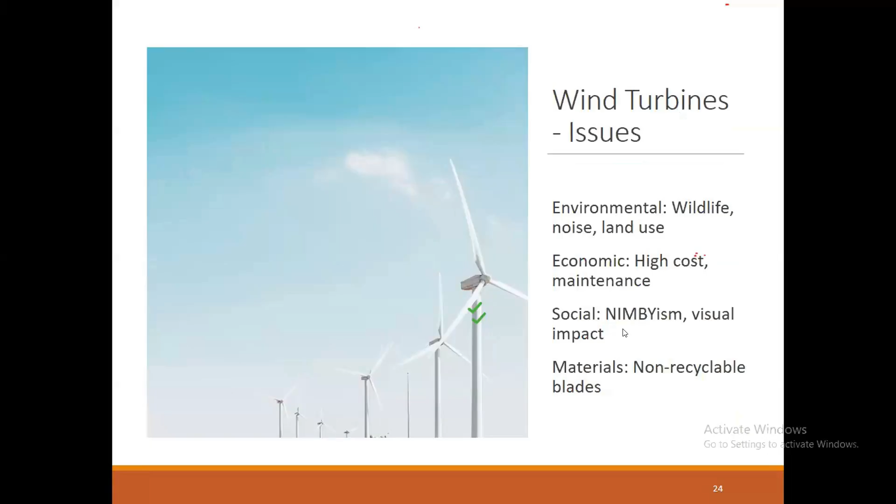The issues we are discussing include environmental impacts on wildlife, noise, land use, economics, high cost of maintenance, social issues like NIMBYism and visual impacts, and material issues like non-recyclable blades. So blade waste is a problem.

There are available works on bird mortality rates, though that's a limited number of studies. A lot of birds are dying because of wind turbines.

That means there are issues even in green technology. Certain questions arise: how to evaluate sustainability? Of course carbon footprint I have already mentioned. If it is reducing global warming potential or water depletion, that is becoming very good.

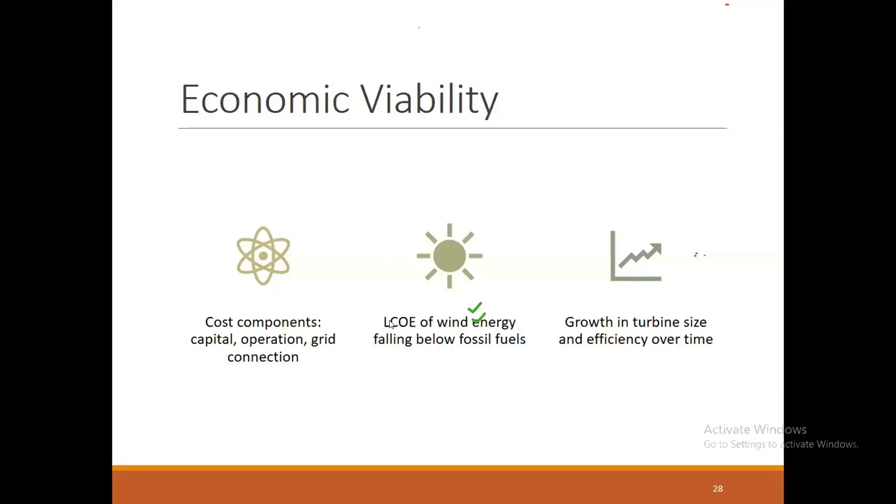We see that cost of electricity is really reducing, but waste disposal and other costs also need to be kept into account. Waste disposal is again a big challenge in such technologies.

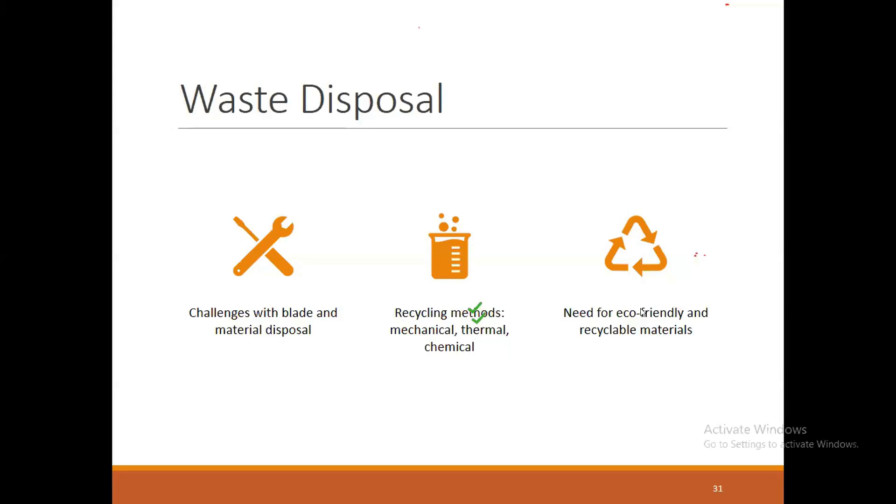For blade material, there are 3 types of recycling methods: mechanical, thermal, and chemical. You can mechanically destroy them, use thermal process like burning or incinerating them, or chemical treatment. But we really need eco-friendly and recyclable materials.

So there are mechanical, chemical, and thermal ways recycling can be done. We can promote sustainability by reuse of material, like cement production, electricity generation, reuse of blades, and disposal.

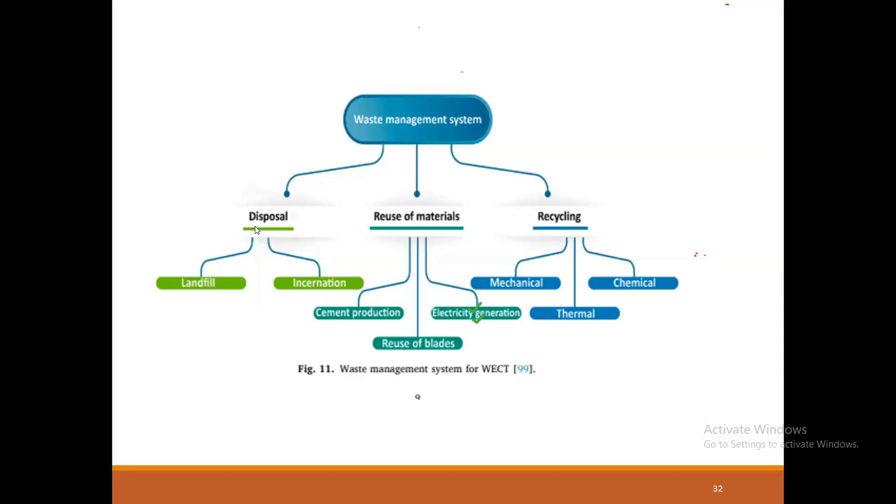If I do plain disposal, I can use landfill - filling the earth where we want to build some structure, putting the debris there, or incineration where they are straight away disposed. But reuse and recycling are better alternatives.

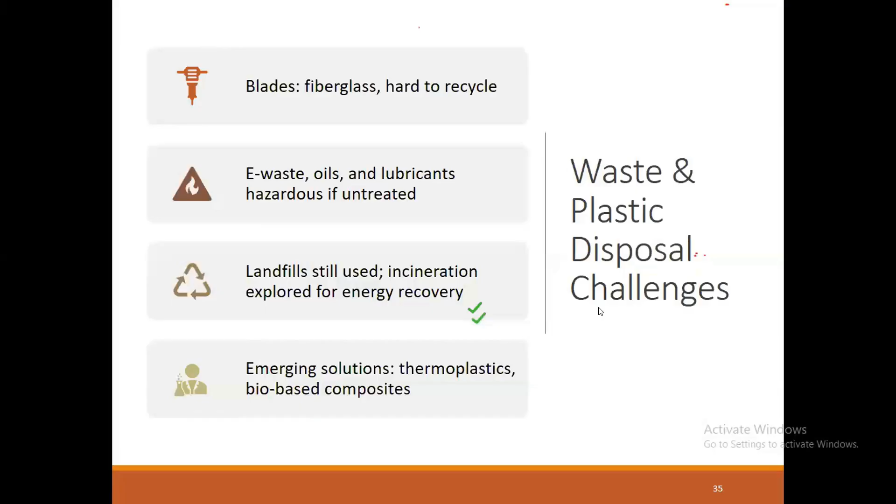Recyclable blade materials, better design, and improved site planning are ways of improving sustainability. Technology advancement is also important.

For blade design, if inspired by biology, we call it biomimicry. For example, a plane does not fly like a bird - plane wings and bird wings are different. Similarly, if a turbine can have some movements following the way a bird moves, maybe I can generate more efficiency.

That field is called biomimetics, and that can be used. Some experimental level things are being made, but eventually that can be a big thing.

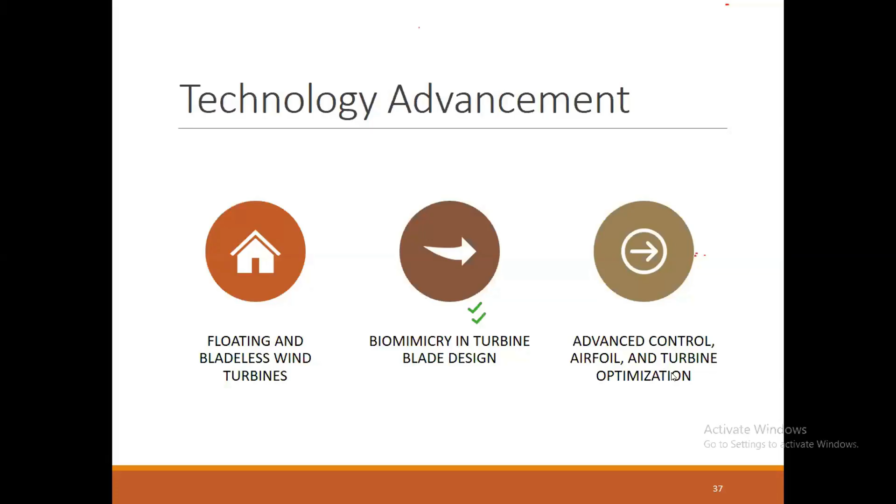Control of airfoil and turbine optimization can lead to better efficiency, therefore better performance, meaning less carbon footprint. There are certain techniques like guide vanes, deflectors, or alternate blade profiles.

For example, suppose this is a wind turbine rotor. Around this, if you make a duct, you can see this is the power coefficient. This is without a duct, and if you make a diverging duct like this, you can see performance increasing. That is called augmentation or enhancement of performance, which also contributes to energy efficiency.

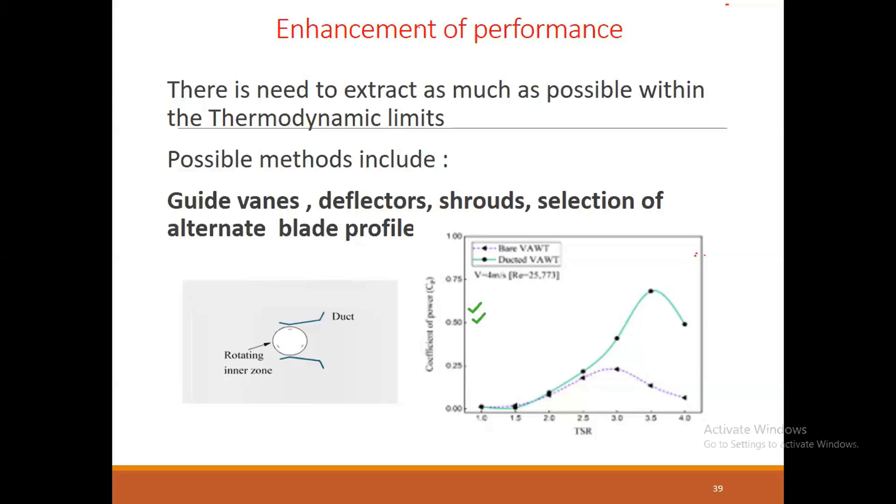Whatever small gain you can get, you should not neglect that to develop the power, because ultimately little drops of water and little grains of sand make the mighty ocean and the pleasant land. Whatever contribution is there, they are welcome, because they reduce the carbon footprint, and eventually small contributions in power saving can lead to large offset.

So there are a lot of innovative designs coming up. Recently I was discussing a design by Riamwind called wind lens. Personally I have not gone into the technical details of this, but they claim that the arrangement of these turbines is such that energy is more focused and efficiency is enhanced. Such innovative designs can be contributors to power.

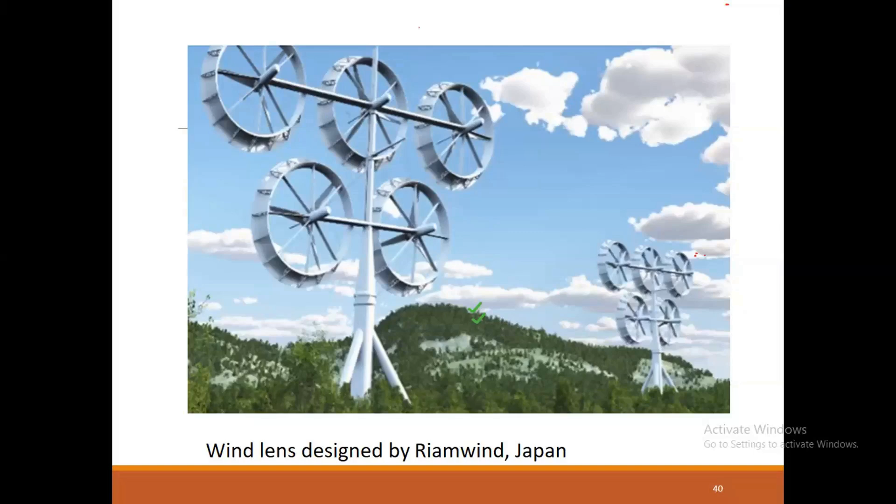There are a lot of tools for looking into sustainability. You have heard of multi-criteria methods, MCDM techniques, for evaluating something where there are issues. For example, I am presenting something called a spider diagram.

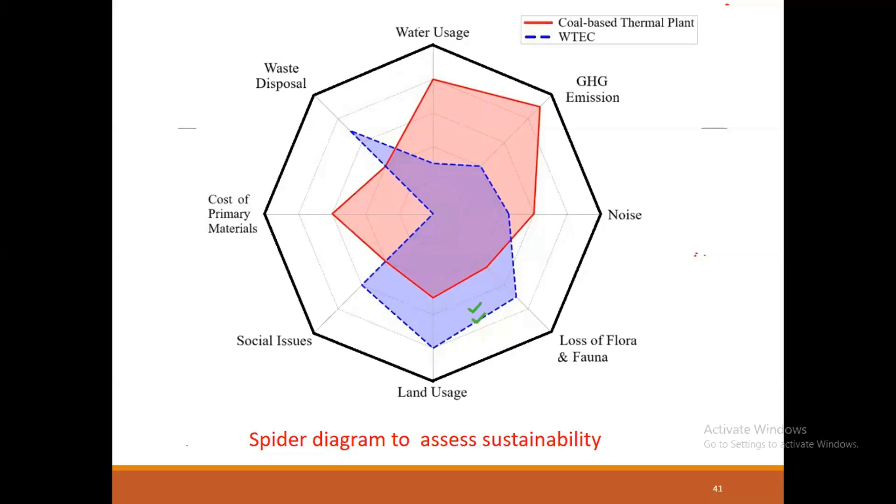So overall, if I talk of earlier topics, I discussed progress in wind turbines and the research areas in wind turbines. Here I focused on sustainability, and we found that while wind turbine technology is a great renewable technology with lot of advantages and potential and scope for research, some sustainability issues are there which will continue to be resolved in future, and for which we need assessment tools like LCA. I wanted to contribute here that for renewable energy, we rarely think of the renewables' negative sides.